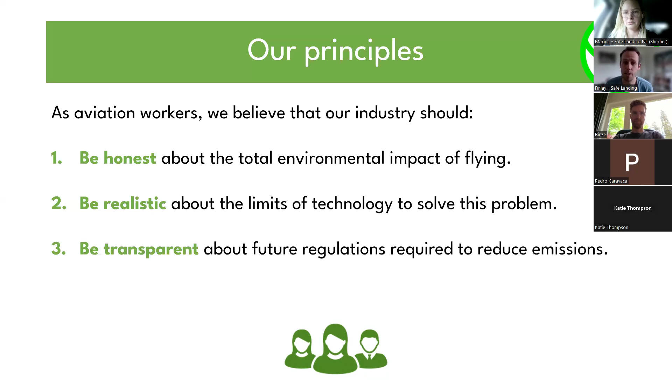Just a kind of background to some of our broad principles as a group. We think our industry should be honest about the total environmental impact of flying, realistic about the limits of technology to solve this problem. And this is why we need to focus particularly on sustainable aviation fuel, be transparent about what regulations are required to reduce emissions, and have a plan that accounts for this and supports workers during any transition. Then, based on that, we've got some positions.

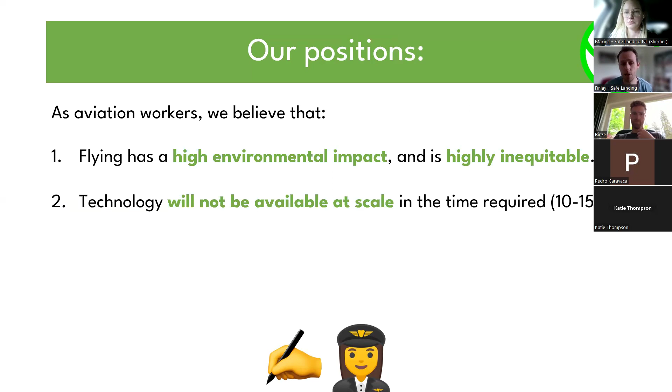So we think flying does have a high environmental impact and is highly inequitable. It's not fairly distributed, and we want to be honest about that situation. We don't think technology, including fuels, will be available at scale in the time required, which is really basically 10 years now. And we need to keep that time scale in context when we're looking at these solutions. So we think future regulations are vital. This includes limiting air traffic. Acknowledging this and planning for this is in all of our best interests.

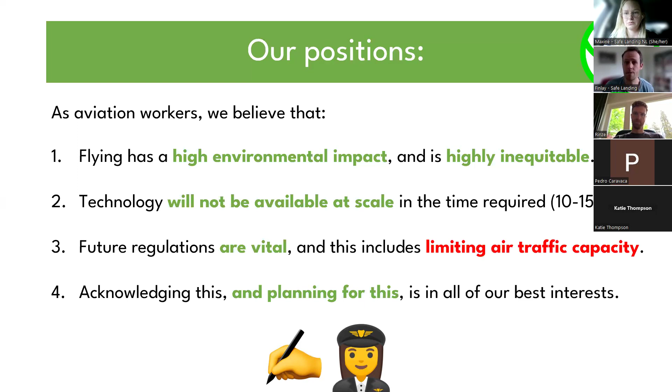So today, we are going to cover our position on sustainable aviation fuel. And this is something we've developed over a few years. We put a post on our website the other week, but this is open for debate, and we're really keen to share this, foster conversation, dialogue, feedback, adjust and modify our position to make it more reasonable. So thanks very much for everyone that's joined, and really looking forward to having a good discussion and getting some feedback.

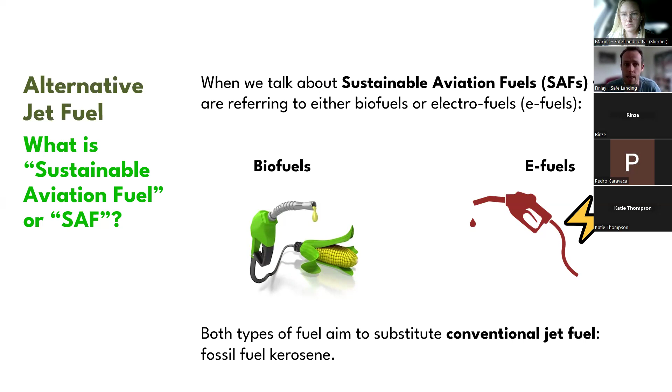So what is a sustainable aviation fuel? When we talk about sustainable aviation fuel, we're generally referring to biofuels or electro-fuels. So biofuels are created from biomass. That could be from crops, could be food waste, farm waste, forestry waste, anything where a plant's grown, whereas electro-fuels are produced from electricity. And both of these fuels aim to substitute conventional jet fuel, what we call kerosene, that's produced from fossil fuels. Now, just as a starting point, we want to discuss whether this term sustainable aviation fuel is really honest and appropriate.

Yeah, we prefer to use the term alternative jet fuel rather than sustainable aviation fuel, because this avoids assuming that any alternative to fossil fuel is by definition sustainable. I think a big issue at the moment is by labeling everything SAF, sustainable aviation fuel, as a coverall, it then stops us diving a bit deeper in assessing the genuine sustainability of some of these feedstocks. We think that sustainability should be assessed and critiqued rather than just assumed. And we think this wording is actually quite dangerous because it stops us doing this.

There has been a recent court case against KLM in Europe, where they've been ordered to not use this term in public-facing communications. And we think, as such, we should be doing this in the environmental movement and within Safe Landing. So we prefer to use the term alternative jet fuel instead.

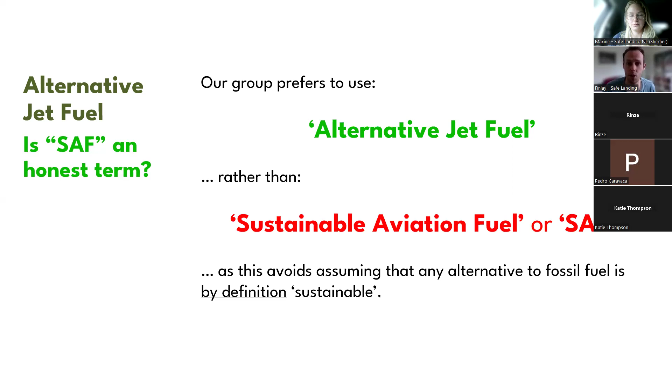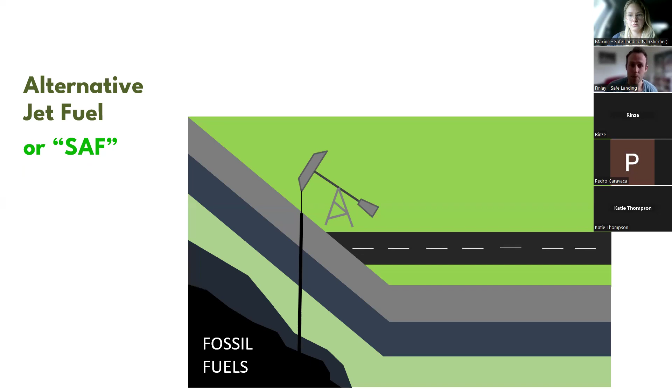So what is alternative jet fuel? What's the principle behind it? So the problem at the moment is we've got fossil fuel, carbon that's been stored deep underground for many millions of years, and it's very stable, and we've stabilized our atmosphere. What we do is we extract that, we process it into a variety of fuels for our cars, power stations, aircraft. That puts additional carbon into the atmosphere, unbalances it, and is causing global warming.

So with these fuels instead, what we look to do is take carbon out of the atmosphere that's already there, process it into a fuel and use that instead. One of these options is biofuel, growing trees, growing agricultural crops. Another option is to take water, split it into hydrogen to make a hydrogen fuel. We can also industrially capture carbon from the atmosphere using direct air capture.

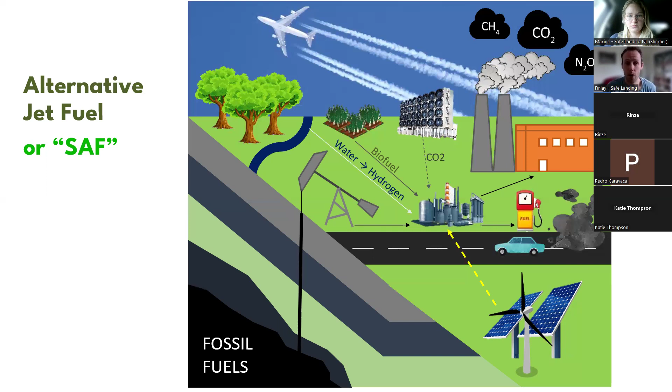And if we power this with renewable electricity, we could combine the carbon and the hydrogen from these sources and make a liquid hydrocarbon fuel that can replace fossil fuels. So it seems like quite a nice circular economy here. And you can see why it's quite an appealing thing for aviation workers to think, oh, we can just replace fossil fuel with an alternative jet fuel, and we won't be adding additional carbon to the atmosphere.

So I usually start with biofuels. I'm going to start with electro-fuels for a change. This is electricity, turning that into a jet fuel. So how does this work? If you just think about conventional fossil jet fuel for a minute, we've got stored carbon underground. We extract that and we get crude oil. We then refine that. We get gasoline, diesel, kerosene out. That's jet fuel. We burn that in an aircraft and we get carbon that goes into the atmosphere.

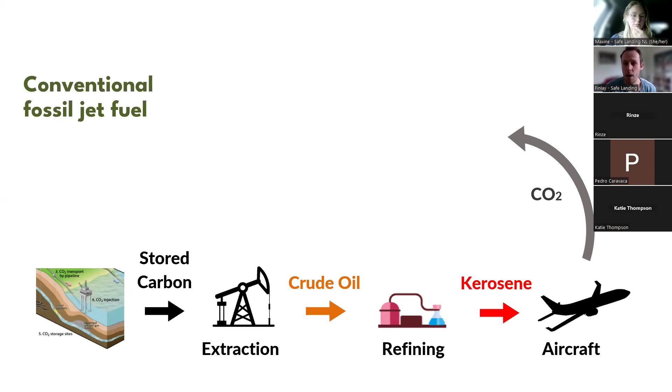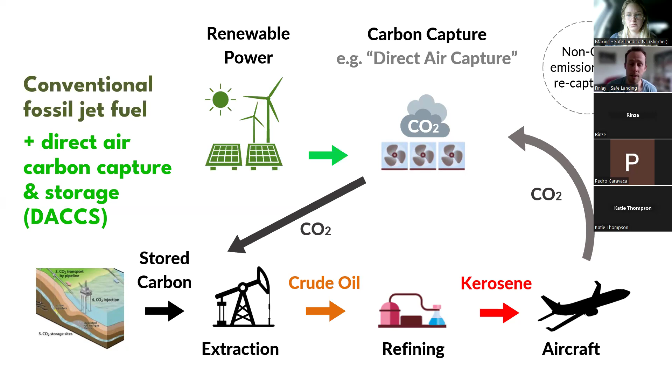What you can do, first thing, is you can have a carbon capture facility that captures carbon from the air and puts it back underground. That's one option, and you can power that with renewable electricity. The next option is to actually use the electricity to firstly split water into separate hydrogen and oxygen. So you've got hydrogen coming out.

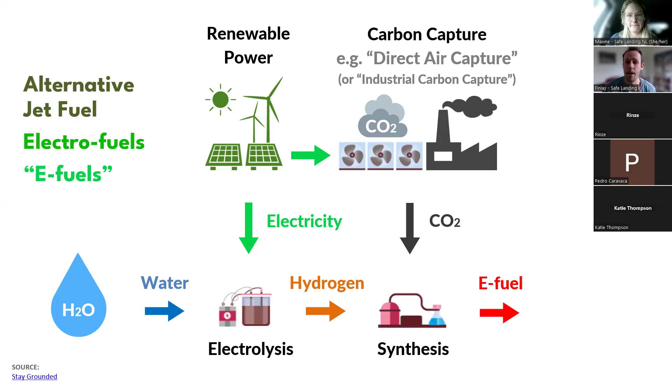You can then also power direct air capture, or you can take carbon from a power station or industrial process to get a source of carbon. So you've got some carbon and some hydrogen. You can combine those to make a liquid hydrocarbon, and that's your e-fuel, your electro-fuel, that then goes into your aircraft, produces the CO2, and that's recaptured again. Noting that there's other non-CO2, non-carbon emissions that aren't recaptured.

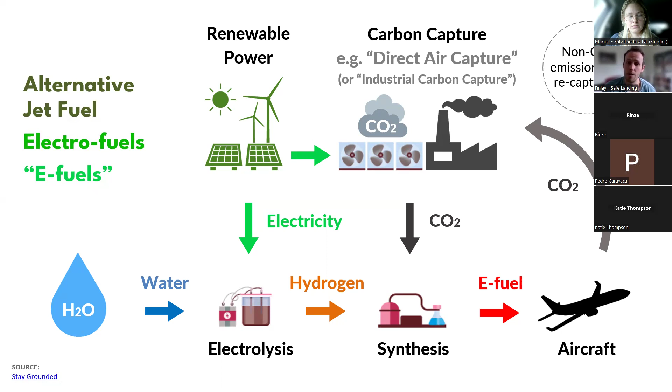The problem with this is it's a very inefficient use of electricity. So all of those processes I showed here, particularly the electrolysis of hydrogen, but also direct air capture, and also the fuel synthesis itself, are very inefficient processes. This means you have to put a lot more energy in than you get out. You actually basically end up with about 10% energy left once you've burned it in an aircraft. What that means is, as I say, it's the most inefficient use of electricity.

So what you find is that if you have 1 unit, 1 megawatt hour or whatever, of low carbon electricity, and you use it for different purposes, you get a lot more savings if you use that electricity to displace coal or gas on the grid, to power an electric car and displace petrol or diesel, or a heat pump and displace a gas boiler in a home. You even save twice as much energy if you just power direct air capture rather than producing synthetic jet fuel.

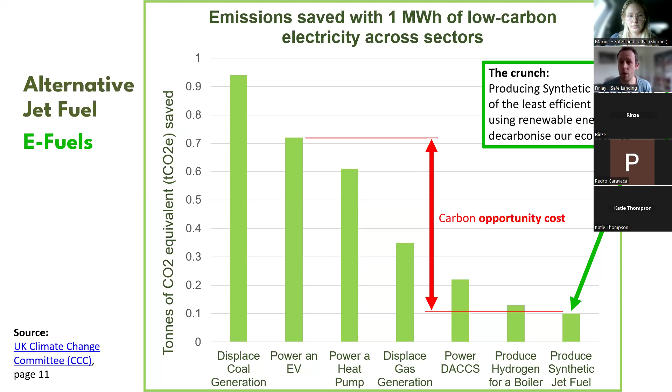So I think a concept that we really need to understand is this idea of a carbon opportunity cost from using 1 unit of renewable electricity for this rather than something else. It is kind of nice to think maybe we have unlimited renewable energy, so we can just do this. But actually, the reality is there's real limits on how much renewables we can build due to planning, due to the time it takes to build wind and solar out. There's lots of fossil fuels still being used elsewhere we need to displace. So particularly in the near term, the next 10, 20 years, if we do produce lots of e-fuel, that will be diverting electricity from elsewhere.

If you just look at the total energy requirements as well, I've done this calculation for the UK. I've hidden the calculation from the screen, but this is how much energy it would take to replace all of the UK's jet fuel with electro-fuel. That's basically equivalent to the entire UK electricity grid, including fossil fuel, which is that grey box. So we need twice the low carbon energy, including nuclear, to produce this, or we need 3 times if you don't include nuclear. You need 4 times the wind generation, or you need 5 times our current nuclear capacity. And the UK has a relatively high amount of nuclear energy compared to other countries. So this just gives you a scale of how much energy is required.

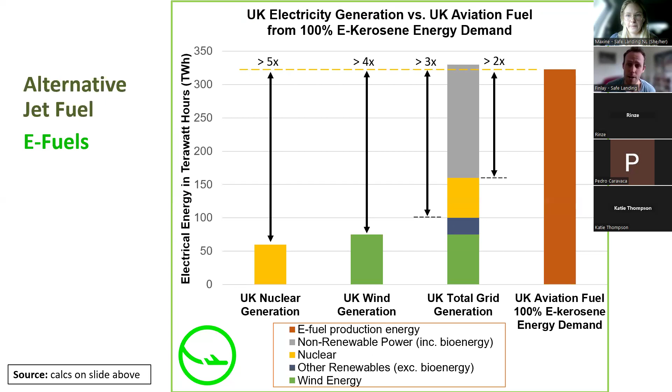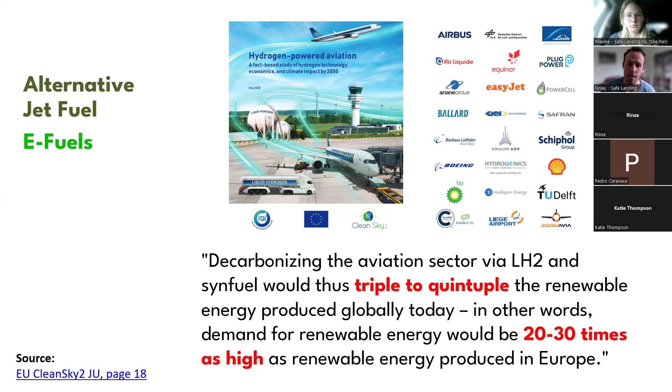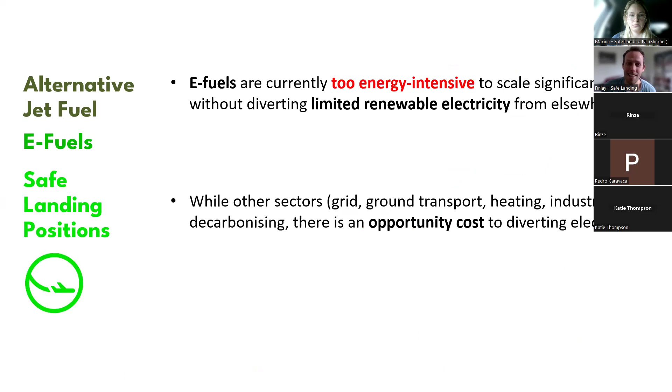So our position on e-fuels: we think they are currently too energy intensive to scale significantly without diverting limited electricity from elsewhere. I've obviously missed a bullet point here. So while other sectors, the grid, ground transport, heating and industry, are decarbonising, there's an opportunity cost to diverting electricity. Within aviation, it appears more efficient to just tax jet fuel and fund carbon capture rather than produce e-fuel.

However, direct air capture itself is less efficient than electric vehicles or heat pumps. And in the near term, we think we should ramp up aviation fuel pricing, carbon pricing, but use this money to fund renewables primarily and direct electrification of other sectors rather than wasting most of that energy as heat producing a jet fuel. And that bullet point that was missing there is something that's fundamental: we need a cross-economy prioritization of renewable electricity before assuming huge quantities for SAF.

So maybe there are some areas where there's a lot of renewable electricity and very little demand. It does make sense to produce hydrogen, for example. We also need to check, do we need that hydrogen for fertilizer, for farming, and for other things? We need to consider that before assuming we can have all energy everywhere for e-fuel production.

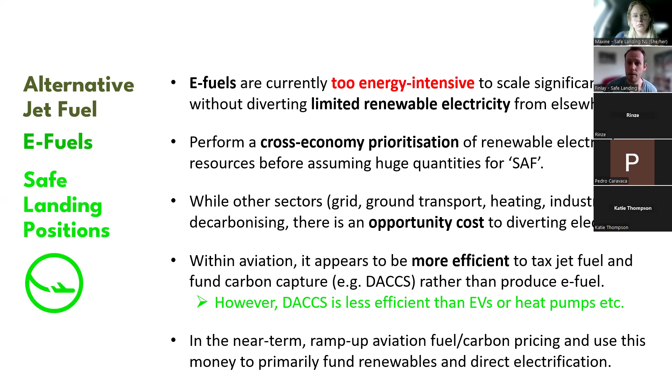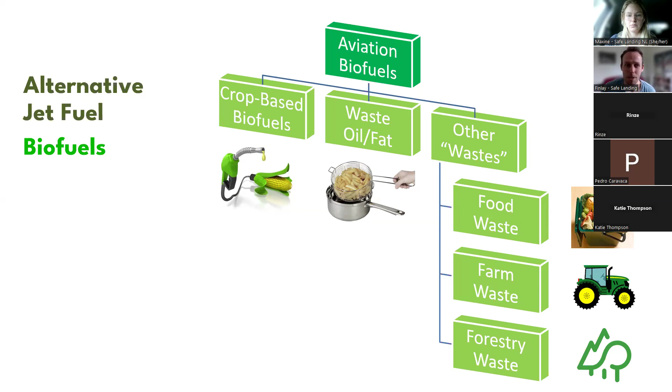So moving on to biofuels. Now, there's quite a few different types of biofuel. I've split them into some categories here. So the first one is first generation biofuels. These are crop-based, from vegetable oil primarily. We've then got waste oil and fat. This is where most sustainable aviation fuel comes from at the moment. There's then other waste: food waste, farm waste, and forestry waste. And this covers most of the biofuel we talk about. We do also sometimes include plastic waste in here, which isn't particularly biogenic.

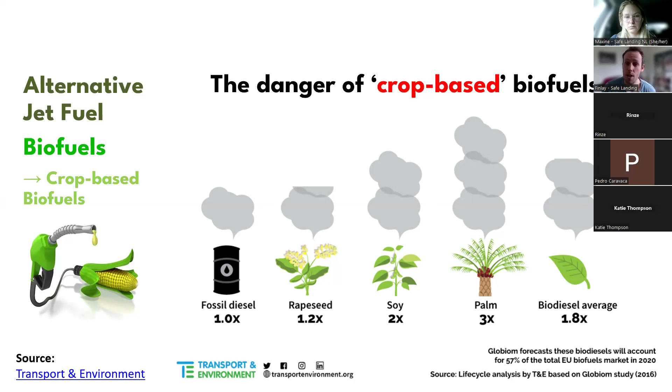So crop-based biofuels first. What is the issue? The danger with crop-based biofuels is they actually produce more emissions than fossil fuel. You can see for rapeseed, soy, palm oil, these are all higher than just burning fossil fuel. The average is 80% higher as well. And this is because of the land use change associated with these fuels.

Just looking at the US, this is the past 40 years. And you can see that of the corn use, most of it is being used for animal feed, a little bit directly as food, and then a growing proportion over the last 25 years for biofuels. This is primarily used in cars for road transport. So you can see right now we're using far more of it to power and feed cars than we are to feed people. What's the problem with that?

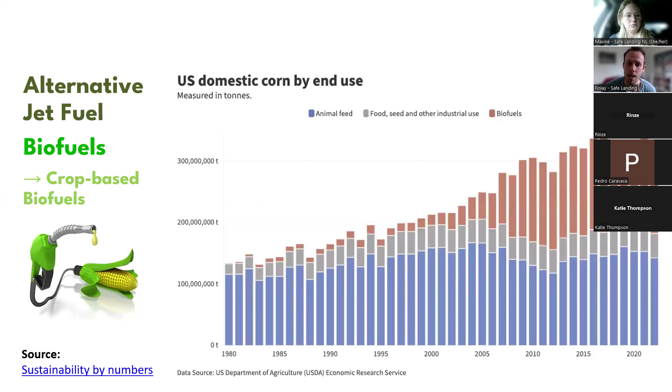Well, if you have a hectare of land and you put a solar panel on it and you power an electric car, this is how many kilometers you can drive. Whereas if you plant corn on that area and you burn it in a car, this is how far you can drive instead. So it's an incredibly inefficient use of land. This is because plants just take a lot of energy to grow. It's sort of 1-2% efficiency solar to energy conversion versus 20% efficiency from a solar panel.

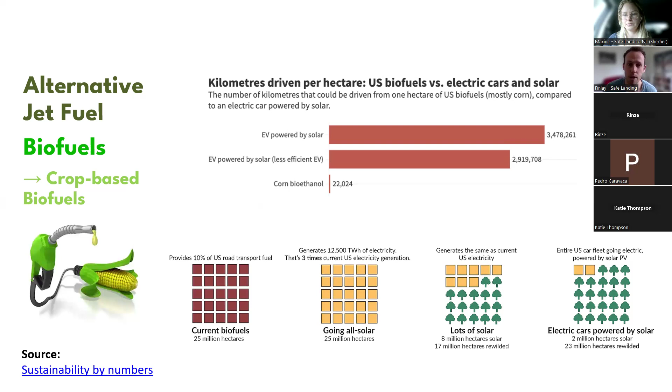At the moment, providing 10% of US road transport uses 25 million hectares of US land. If we covered that land in solar panels instead, we could produce 3 times current US grid production. If you want to replace all grid production with solar, you then free up 17 million hectares of land for rewilding. If you just want to power the car fleet, you could have 23 million hectares of land. So if we can get ourselves off crop-based biofuels, we provide ourselves with a lot more land that we can use to rewild, help return carbon to the soils and allow biodiversity to survive.

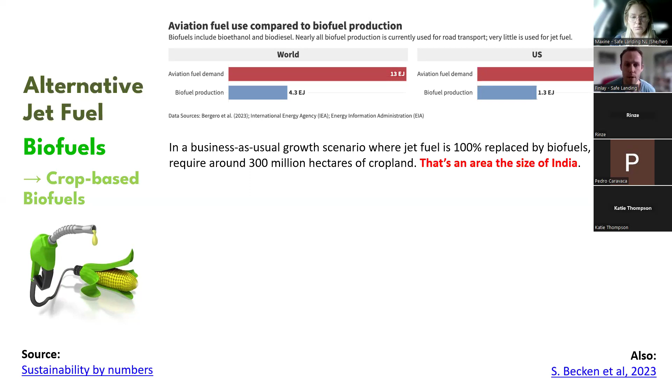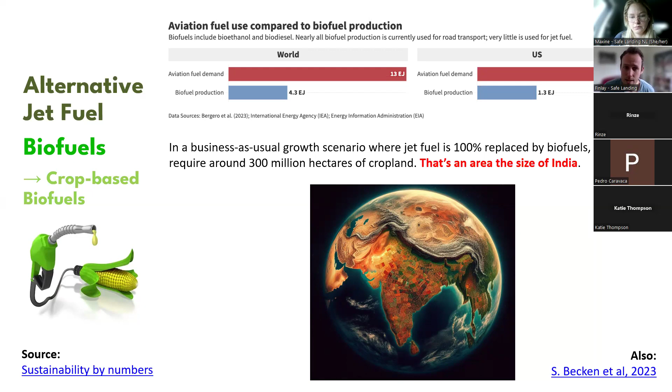So as well, just thinking globally, there's a reference here, but we think business as usual growth, if we provided that with 100% biofuels, we'd need about 300 million hectares. That's an area about the size of India, which is one of the biggest countries in terms of farmland, kind of equivalent to the US. So we'd need to cover that entire country in crop-based biofuels to meet aviation demand.

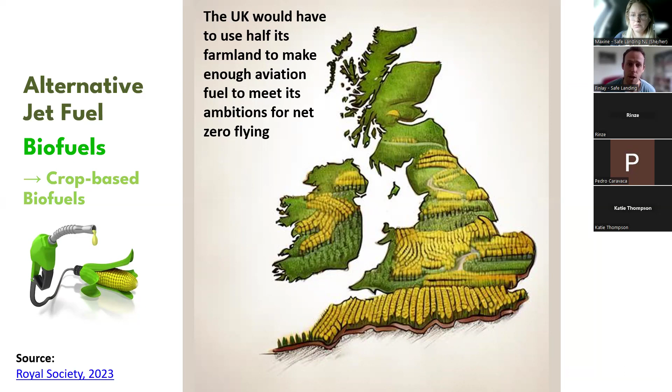Just doing the same calculation for the UK, the Royal Society estimated we need half of farmland in the UK to meet UK jet fuel demand. So our summary here is just avoid crop-based biofuels. We really think it's a sort of environmental dead end. We really risk wasting a lot of our time, money, and resources on something that's a false solution.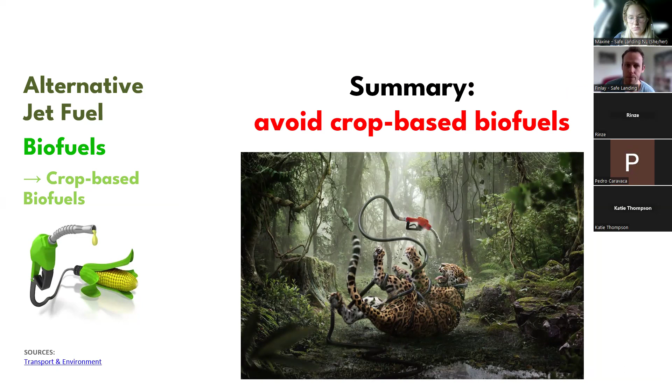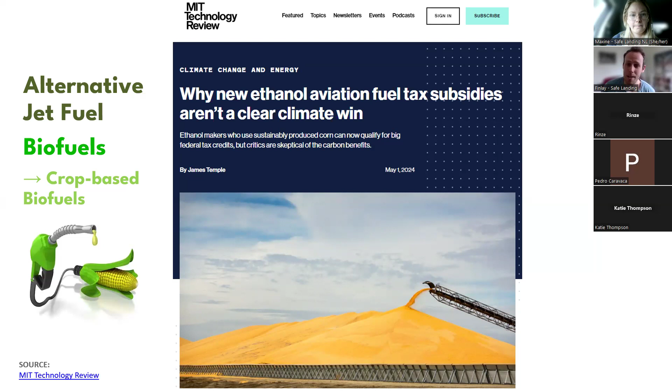In 10 years' time, we're going to agree that this is unsustainable and we'll need to stop it, and we'll regret what we've done. We can already look back at the last 15 years of this with regret, and we should try and move away from it as soon as possible. However, last week, there was news that in the US, subsidies are still being given to corn ethanol. So even in May 2024, this is still happening, and you can read more about it in the pack.

So what is the industry doing? In Europe, the industry is saying we're not going to use crop-based biofuels. We're going to use waste instead. The first one that comes up is this pathway called HEFA, which is from waste oil and fat. So you've got waste oil, you've got animal fat from slaughtering animals and taking the inedible fat. Just as a reference, for a flight across the Atlantic, Paris to New York, we'd need to kill about 9,000 pigs to get enough animal fat for that, which is clearly not particularly ethical or ecological or sustainable.

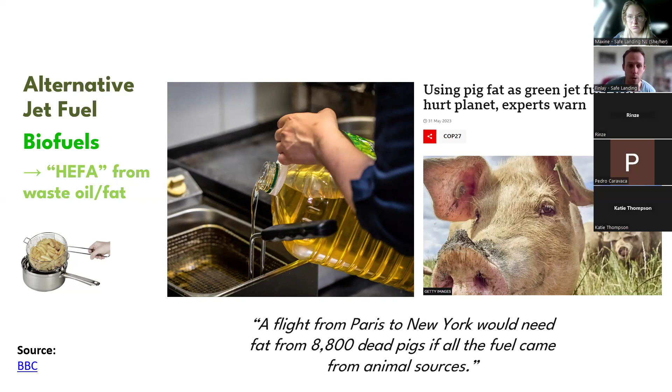The problem with used cooking oil is there's just not that much of it. And if we maximize demand, we end up importing a lot of it from other countries. At the moment, North America and Europe import a large quantity from Asia. This is where there's a lot of palm oil being grown. If we incentivize a large amount of used cooking oil being used here for aviation, it's quite likely that in Asia they switch to more palm oil, and we indirectly cause the same impacts as crop-based biofuel. And again, there's an article you can read more about that.

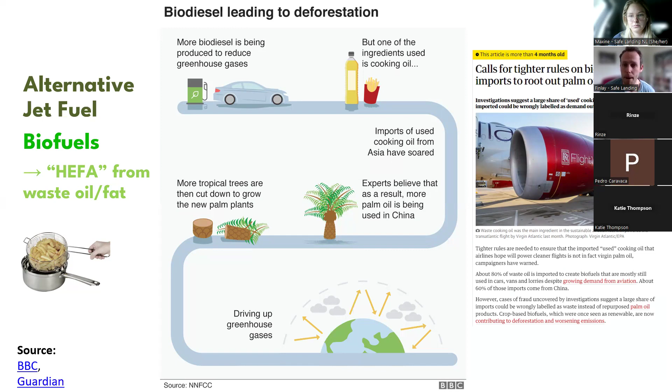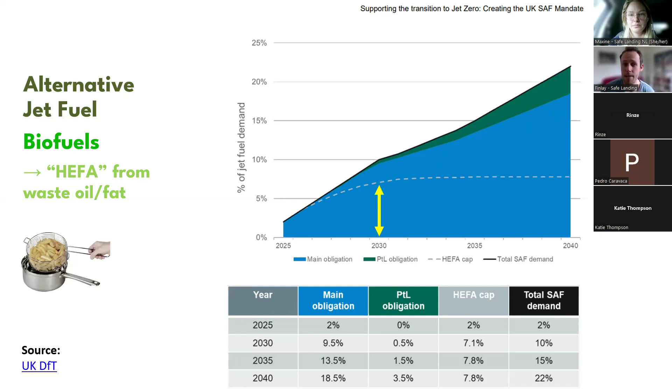However, this is the UK's plan for jet fuel. We're aiming for 10% by 2030, and we're allowing 7 or 8% of that to come from this HEFA waste oil and fat supply. Now, we know that actually with HEFA waste oil and fat, we can only really get to about 2% sustainably using domestic supplies before we start basically using more than our fair share, and we'll incentivize these negative practices. So there's a big emphasis at the moment on a fuel that is just fundamentally not scalable.

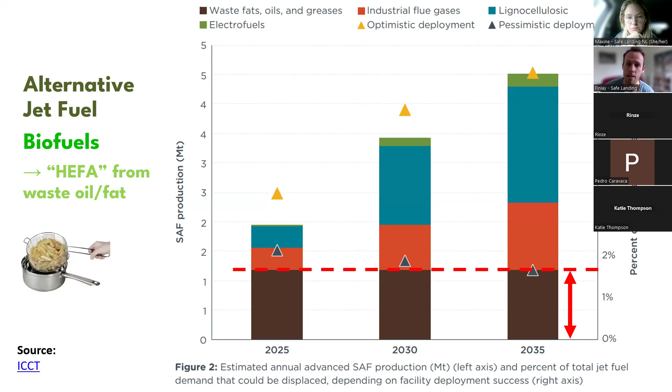The other ones on this graph, this is biomass. So there's industrial flue gas, and lignocellulosic biomass is the blue. You can see that's potentially more scalable, but that's from waste, forestry, farm waste that is more difficult to collect and process, as we'll get into in a second. Now, the industry admits, even though this is the only commercialized SAF feedstock, it's the only one we're really planning to scale in large quantities this decade.

Industry CEOs themselves say there isn't enough cooking oil in the world to power a day of green aviation. Qatar Airways CEO says we're not going to reach the 2030 targets. There's not enough raw material. This isn't something that I'm saying is behind closed doors knowledge. It's something the industry is openly admitting, yet this is the main part of our strategy.

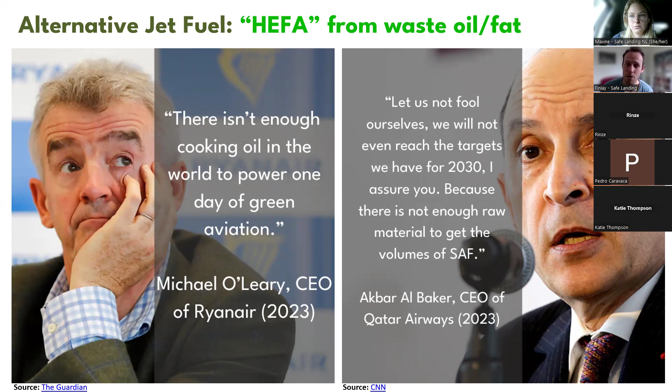The other thing I just want to touch on is at the moment, as I say, we're in the UK, about 80% of our used cooking oil comes from Southeast Asia. Think about it, it's being collected from fast food places in Asia, or potentially fraudulent supplies, shipped halfway across the world in a tanker, and then processed into a jet fuel here so that we can fly. But literally, there's aircraft that take off every day in Southeast Asia that can make use of the fuel there and minimize the supply chain. So does it make sense to be doing this?

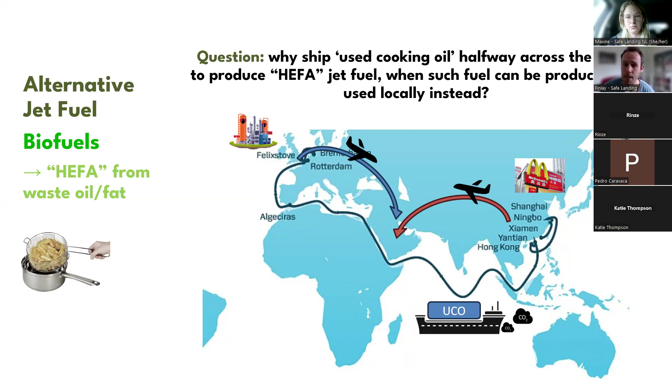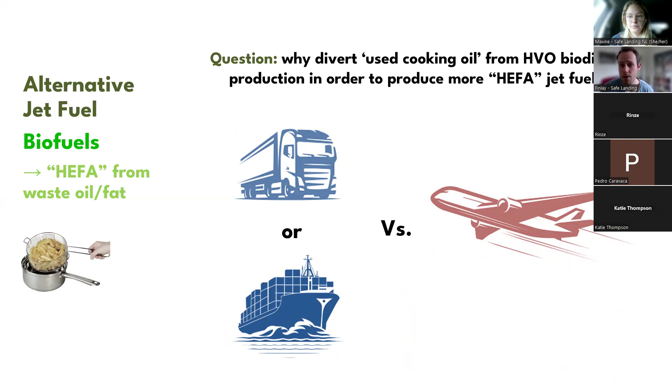Does it sound environmental? The other aspect is whether we use it in the UK or China or wherever, does it make sense to turn it into biodiesel or turn it into jet fuel? And basically, it's far more efficient to turn this into biodiesel that can be used in ground transport and produce some jet fuel. If we end up prioritizing jet fuel, the efficiency of the process goes down. We get less fuel and less carbon savings as well. So that's dangerous.

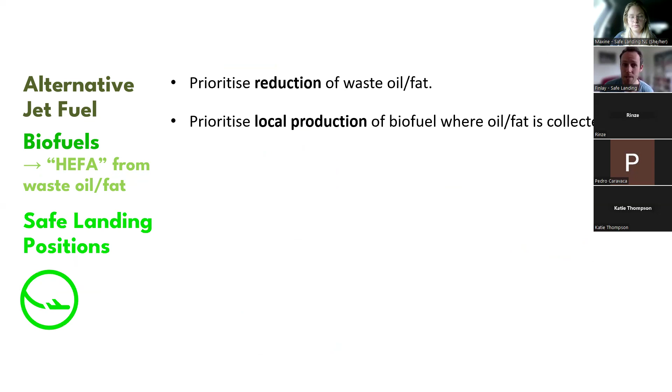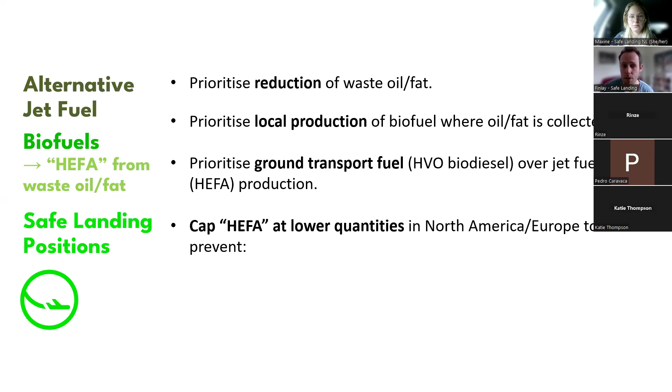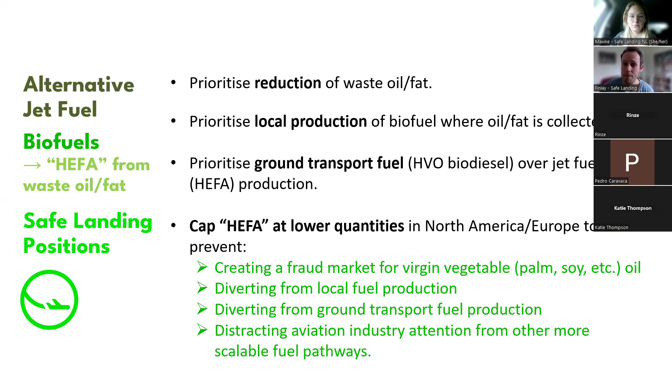So just our positions on this. We think we should prioritize a reduction of waste oil and fat in the first place, prioritize local production, prioritize ground transport over jet fuel production. We should cap HEFA at lower quantities, particularly in North America and Europe, to prevent creating a fraud market, diverting local fuel production, diverting from ground transport, and also fundamentally distracting our industry from other more scalable fuel pathways that might be more expensive to develop, but we fundamentally need to get them at scale.

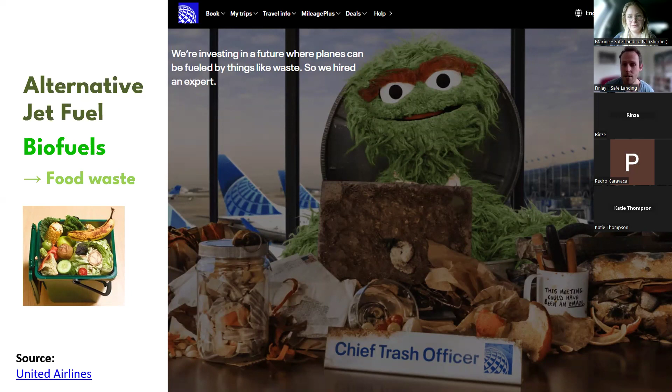So if we go and have a look at food waste next, you can go into the United Airlines website. They're using a Sesame Street character for basically saying we can convert food waste into fuel. There's an advertising campaign on YouTube that's very cuddly, friendly and has people thinking, yeah, this is possible.

They even mention algae-based biofuels in this short commercial, but if you read the small print, SAF is less than 0.1% of United's overall fuel use. Algae is not currently used to make SAF. So quite misleading, this entire thing, and it's putting kind of a cuddly, friendly face on this.

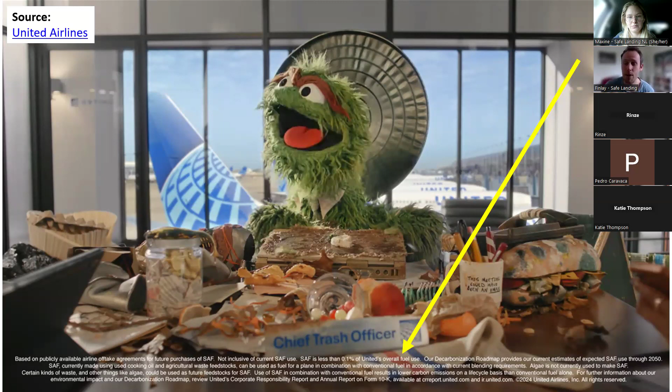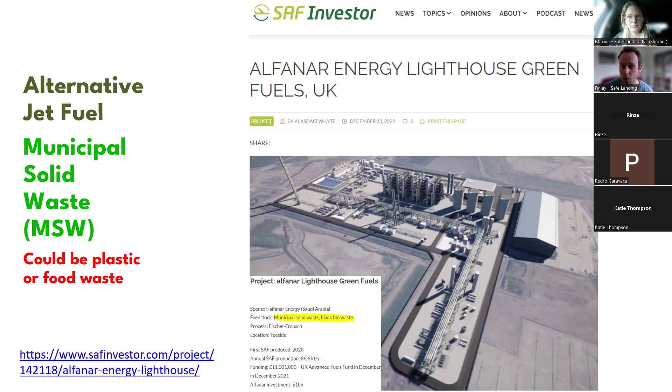If you think about plastic waste, what we're doing is we're extracting fossil fuels, we're producing some plastic, we're collecting it, we're reprocessing it into a jet fuel and burning it again. So eventually, fossil carbon ends up in the atmosphere. But we're adding all these additional processes, which are in themselves emissions intensive, and it's not really any more sustainable.

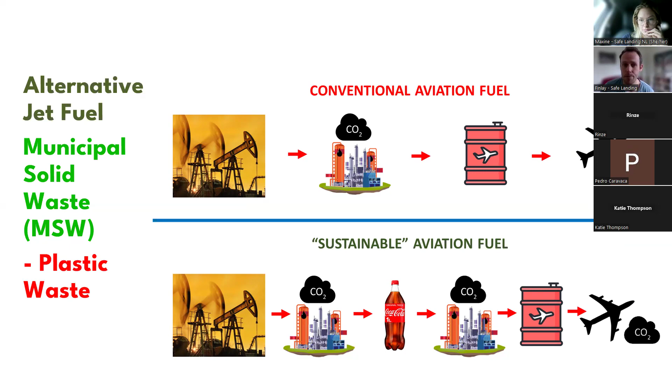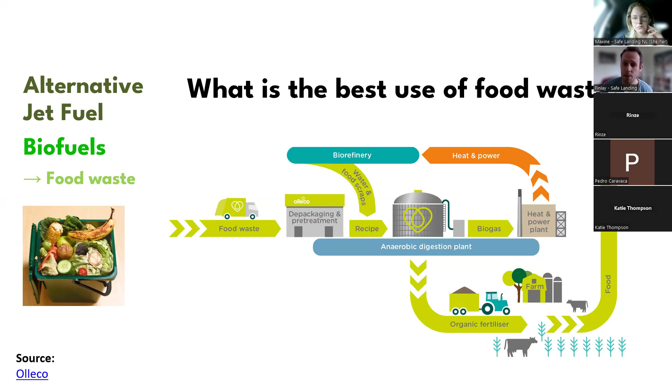The other thing is, let's just say we can separate all the plastic from the food waste. Something you can do with food waste is take it to an anaerobic digester. This produces organic biogas that can go into the grid, and an organic fertilizer that can be used on the farm. This retains nutrients from food in the soil, not just carbon, but also phosphorus, potassium, etc., and stops us needing to produce even more fossil fuel fertilizer.

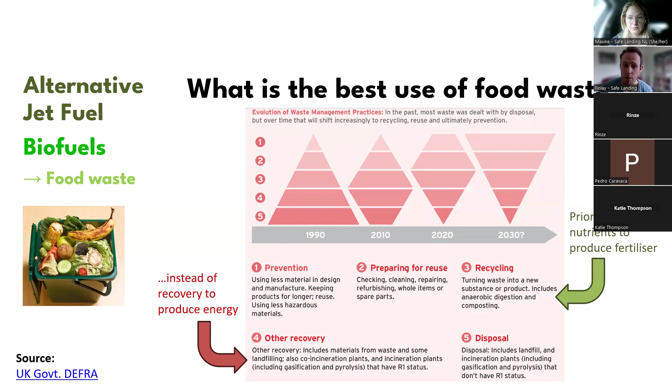If you look at what the government says about this, they say we should be prioritizing recycling and nutrients to produce fertilizer over energy recovery, whether that's at an incinerator or producing jet fuel. So basically we should ideally be prioritizing animal feed, surplus food, biomaterials like rice husks to make coffee cups, and anaerobic digestion and composting, before we get down to recovering the energy from the waste.

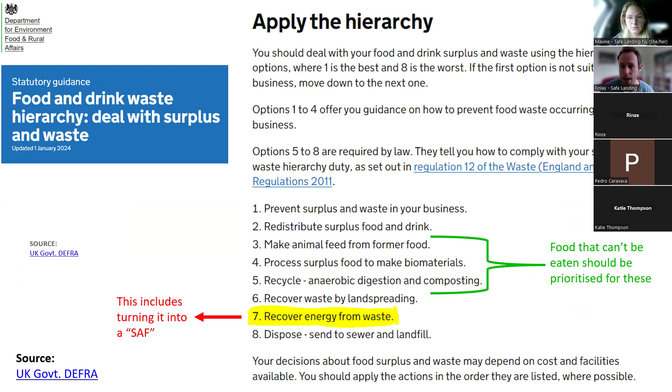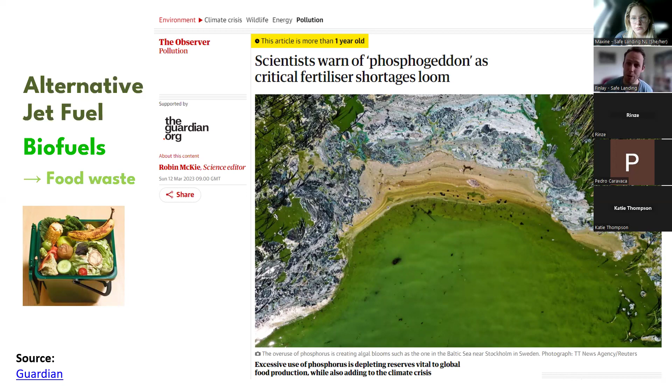Just why this is important with fertilizers: we're also running out of the ingredients for making fertilizers. Firstly, we use fossil fuels, but also we collect phosphorus, and we're really worried that we're running out of this stuff as well because we're putting it onto our fields and we're not returning it. So there's more that we need to consider outside of aviation here.

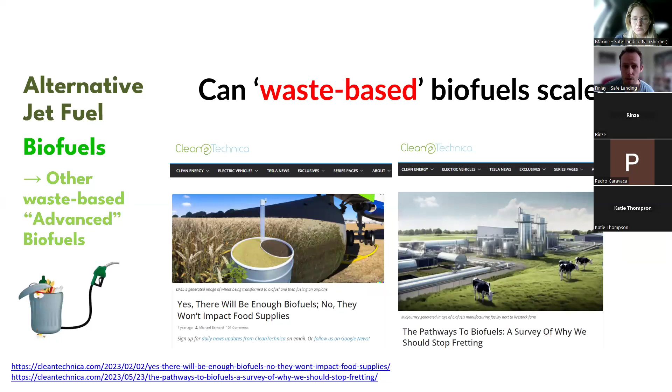Other waste-based biofuels. I put a couple of articles here that say there is enough waste-based biofuels. We're going to be okay. We need to not worry. I would recommend checking out these articles because maybe they are correct, but we just want to provide a little bit of realism to this. So one of the problems with waste-based biofuels is there isn't that much of it, and there's competing uses.

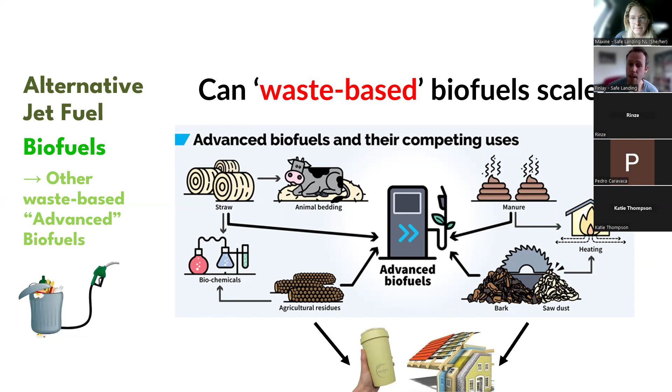So if it's farm waste, we could turn this into biochemicals. If it's straw, obviously animals eat that, animals sleep on it. The same with manure. This could be used for fertilizer. It could also be used for heating on the farm. Sawdust, bark: we can make coffee cups from rice husks or insulation from sawdust. There's multiple uses of this stuff before we even consider composting it, digesting it, or making a fuel.

Going back to what the industry says: biofuels' reliance on feedstock, changes in land use, water use, monoculture mean that aviation will be competing with other interests that need that feedstock for other purposes. So this is a risk we have identified as an industry.

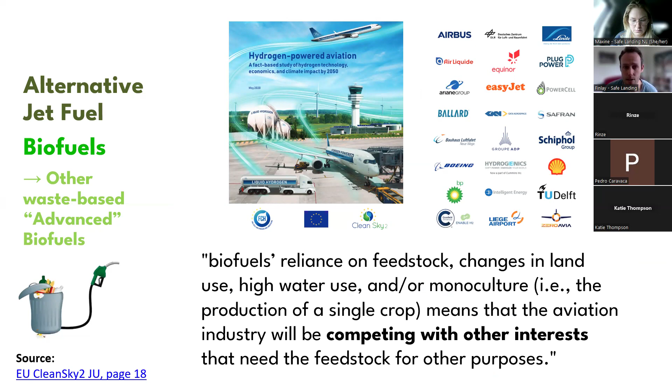If you look at what Transport and Environment say, they've done an assessment of how much advanced biofuels will be available. This is, I think, in Europe, and they reckon we can maybe get to 11% of aviation demand in 2050. The competing uses we need to consider: fertilizer production, bioenergy with carbon capture and storage, road transport fuels, because we're not going to be able to fully electrify those for 15, 20 years, shipping fuels, bioplastics, and we're not doing a cross-sector analysis and prioritization of this.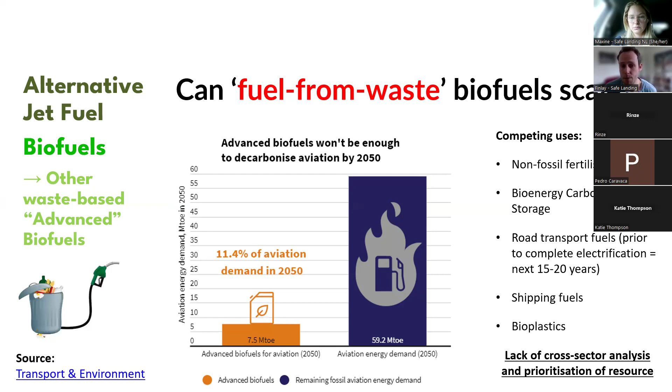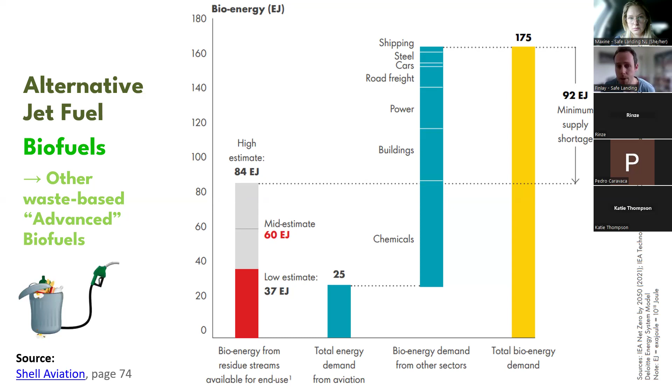This is a chart from Shell showing low, medium, high estimates of biofuel. Aviation could potentially use the entirety of the low estimate, but so could the chemical sector. That's where the bioplastics are coming from, and other things as well. And then we've got a variety of other sectors, and even assuming a high estimate for biomass, the potential demands are outcompeting that. And that's why maybe aviation should get some of this, but should we assume it gets all? I think that's a really dangerous assumption.

Looking at just a different chart as well from the Committee on Climate Change, they've got this low, medium, high estimate of supply as well. Aviation, again, could use all of the high estimate, but also you've got potential for bioplastics and also bioenergy, carbon capture.

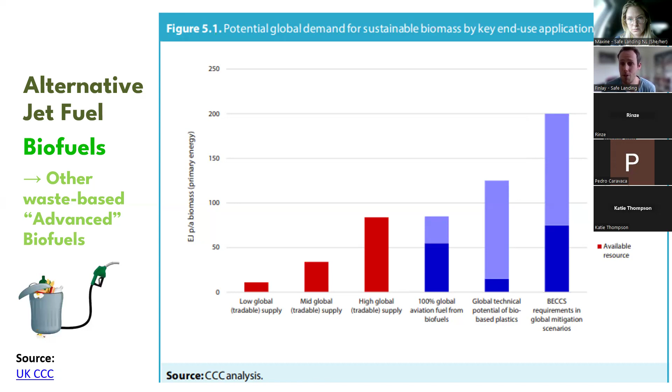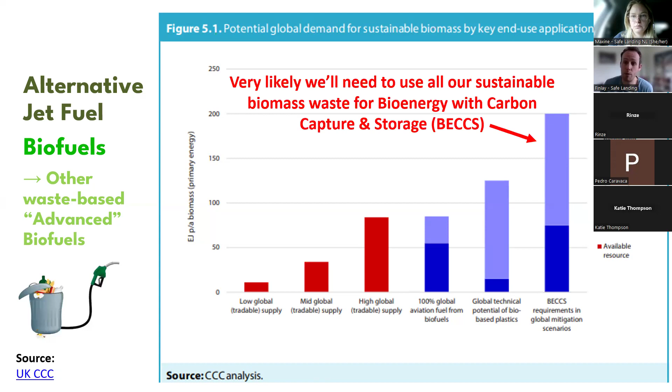So if we blow our carbon budget, which we look like we're on track to, we need to extract carbon from the air. Direct air capture is very energy intensive, it's very expensive. You can imagine governments are putting more pressure on this, and it might be that we certainly need all our waste from that to avoid crop-based BECCS as well. So these are all risks that we think we need to be aware of.

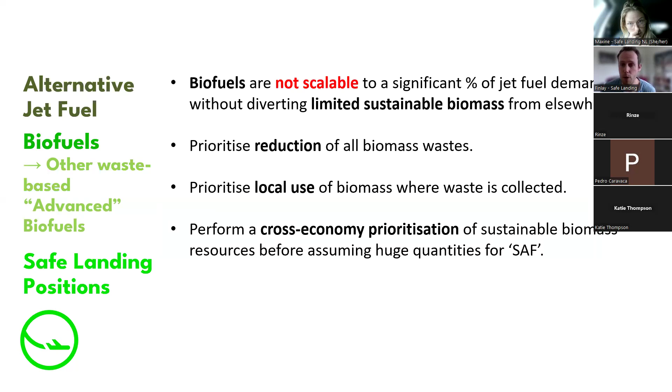So our positions: we think biofuels are not scalable to a significant percentage of jet fuel demand without diverting limited sustainable biomass from elsewhere. We think we should prioritize reductions of all biomass waste as a priority, use local use of biomass where it is collected. Again, this cross-economy prioritization of sustainable biomass before assuming we use a lot for SAF. Prioritize fertilizer production over jet fuel production.

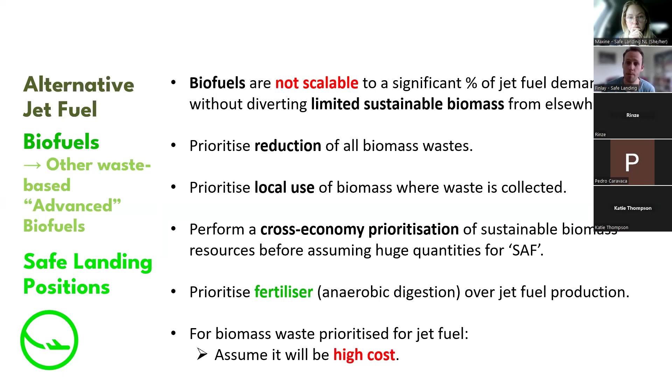And if we do prioritize it for jet fuel, we should definitely assume it will be high cost because it's difficult to collect, it's difficult to process, and that means that we can't just assume that it's going to be staying like 1-2 times the cost of jet fuel. It might well be 3, 4, 5 or more times the cost, and we need to plan for that as an industry. So just a summary of our positions, and then we can wrap up and get some questions.

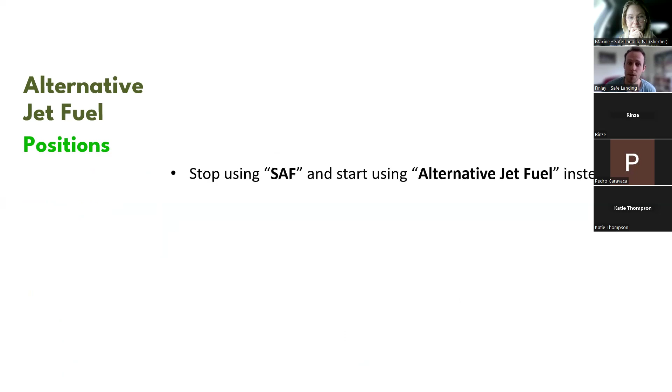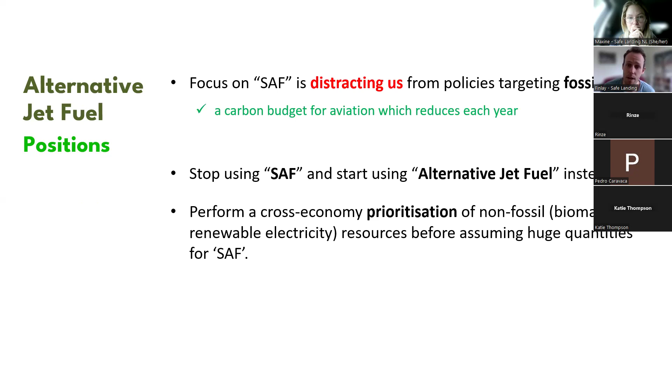So firstly, I think stop using the term SAF, start using alternative jet fuel instead. Perform cross-economy prioritization, both for biomass and renewable electricity. Primarily, we think focus on SAF is distracting us from policies targeting fossil fuels. So we need a carbon budget for aviation that reduces each year. We need financial policies that target fossil fuels to raise revenue like jet fuel tax and frequent flyer levy.

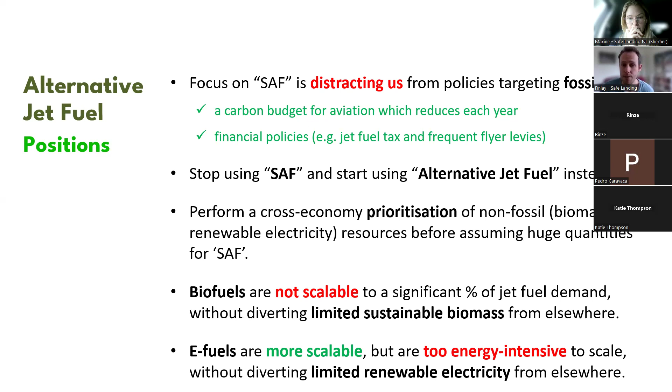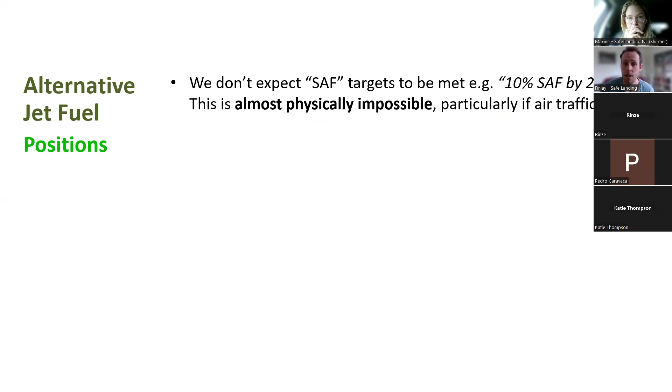We don't think biofuels are scalable. And while e-fuels appear more scalable because they use less land, in theory, they're so energy intensive that they will divert limited electricity from elsewhere. Then again, we don't think these SAF targets, the 2030 targets, will be met. It's almost physically impossible, particularly if we grow air traffic.

And then funding. So we know that these fuels, whether it's electro-fuels or advanced biofuels, will be far more expensive than conventional jet fuel today. This should be paid for by air travelers. Governments aren't going to be able to afford the trillions it's going to cost for these fuels, and we need to factor that into business models within the aviation sector.

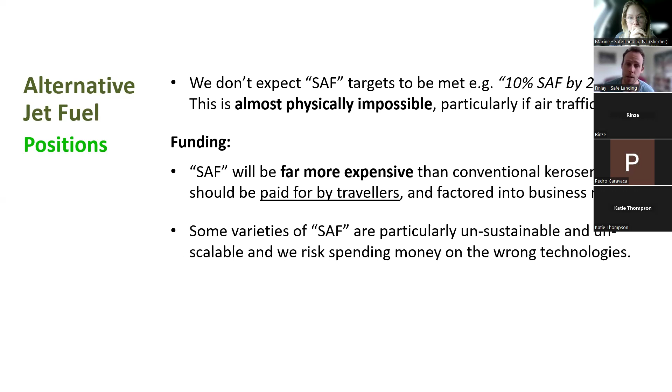Some varieties of SAF are particularly unsustainable and unscalable, and we risk spending a lot of money and wasting a lot of time on the wrong technologies if we're not more critical. We prefer government money to be spent, if it's in the energy sector, on building renewables. If it's in the transport sector, ideally public, electrified ground transport, and within the aviation sector, on more efficient aircraft designs that minimize total fuel burn to minimize the impacts of any fuel type that we can produce.